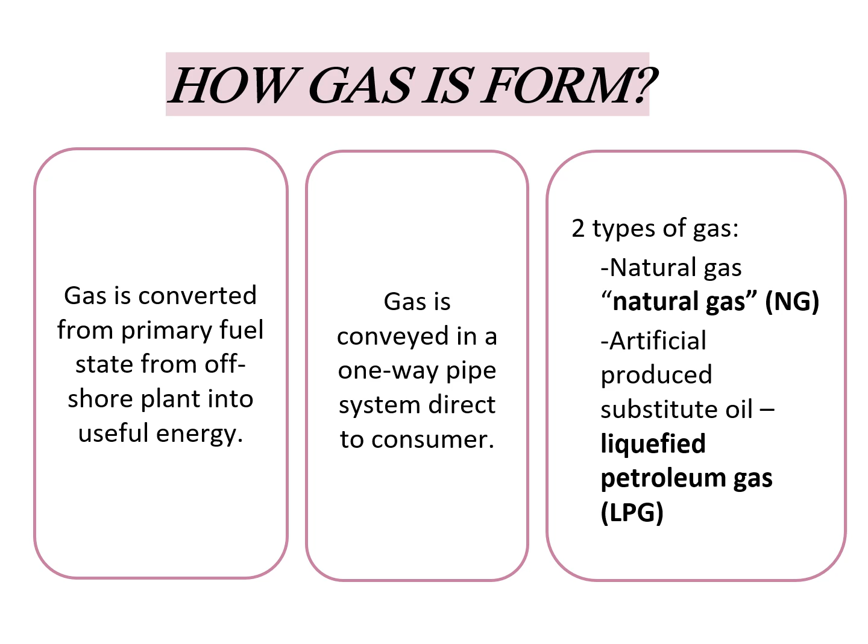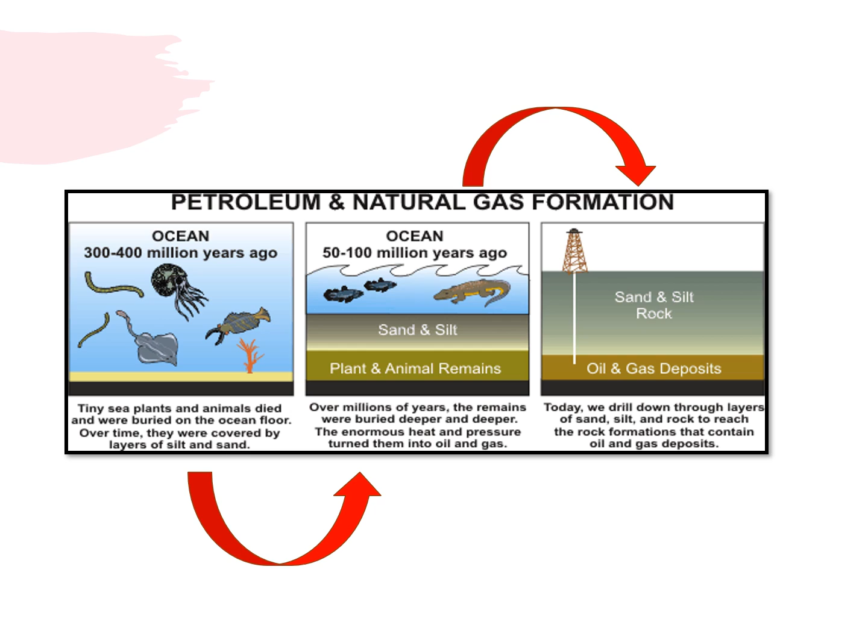Natural gas. What is natural gas? Natural gas is a gaseous fossil fuel consisting primarily of methane, but including significant quantities of ethane, butane, propane, carbon dioxide, nitrogen, helium, and hydrogen sulfide.

Methane consists of 95% propane and 5% butane. It is extracted from crude oil and natural gas. Natural gas is informally referred to as simply gas, especially when compared to other energy sources such as electricity.

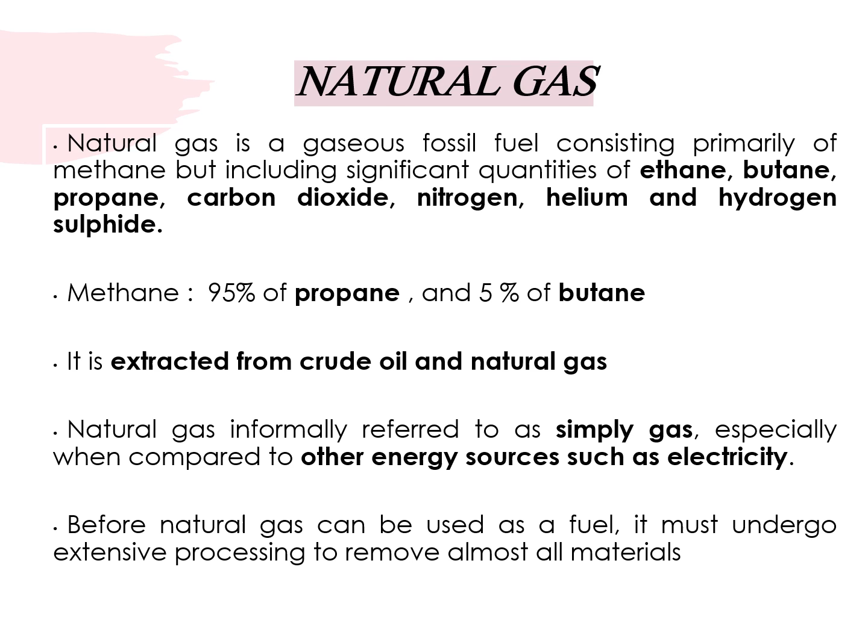Before natural gas can be used as a fuel, it must undergo extensive processing to remove almost all materials that can act as a clean alternative, while it will produce relatively few pollutants, fewer emissions than coal or oil, and has virtually no ash particles left after combustion.

In Malaysia, natural gas is used for residential and industrial activities such as the production of steel, glass, and ceramics. These days, even electricity generation and transportation have started to reap the benefits of using natural gas.

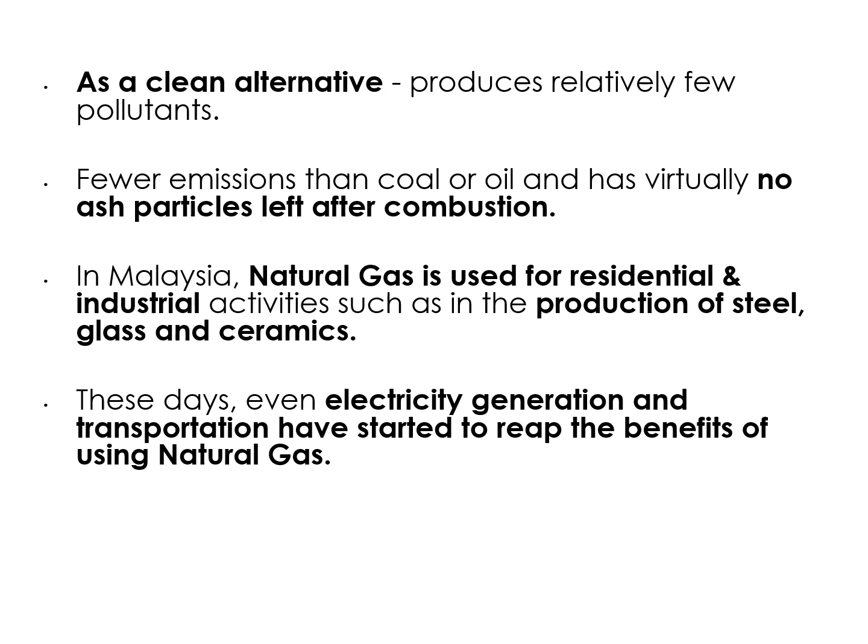Gas Supply Act 1993. The Gas Supply Act 1993 provides for the appointment and functions of a Commission of Gas Supply, the licensing of the supply of gas to consumers through pipelines. Other related matters include the supply of gas at reasonable prices, the control of gas supply pipelines, installations and appliances with respect to matters relating to safety of individuals and for purposes connected therewith.

Section 30, Number 8. No person shall, without the lawful authority of the licensee, undertake any work or engage in any activity in the vicinity of any gas pipeline or installation or part thereof in a manner likely to interfere with such pipeline or installation or part thereof, or to cause danger to any person or property, unless the licensee has taken all reasonable steps to give proper notice on the existence of any pipeline or installation or part thereof and measures as prescribed by the Commission for the protection of such pipeline or installation or part thereof.

Section 30, Number 9. Any person who contravenes subsection 8 shall be guilty of an offence and shall, on conviction, be liable to a fine not exceeding 5,000 ringgit or to imprisonment for a term not exceeding 2 years, or to both.

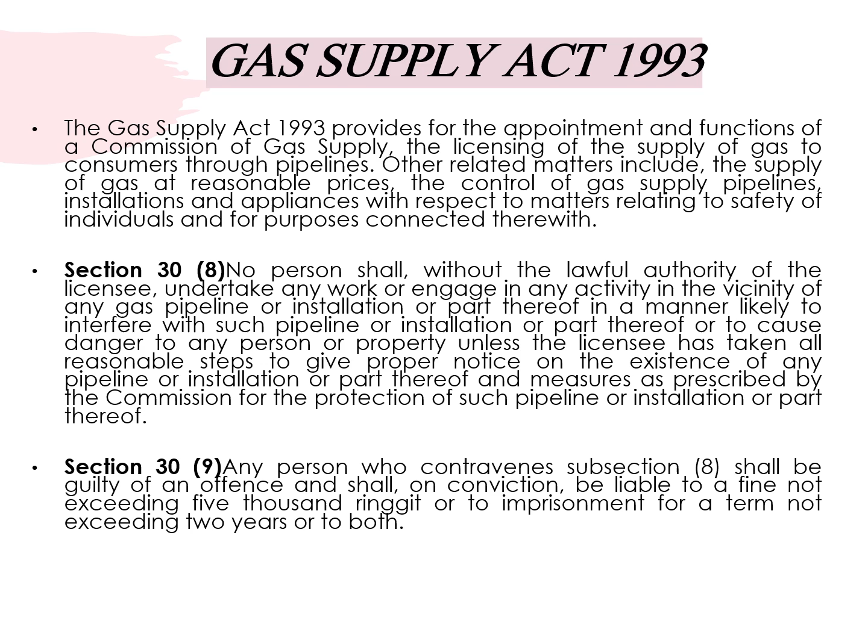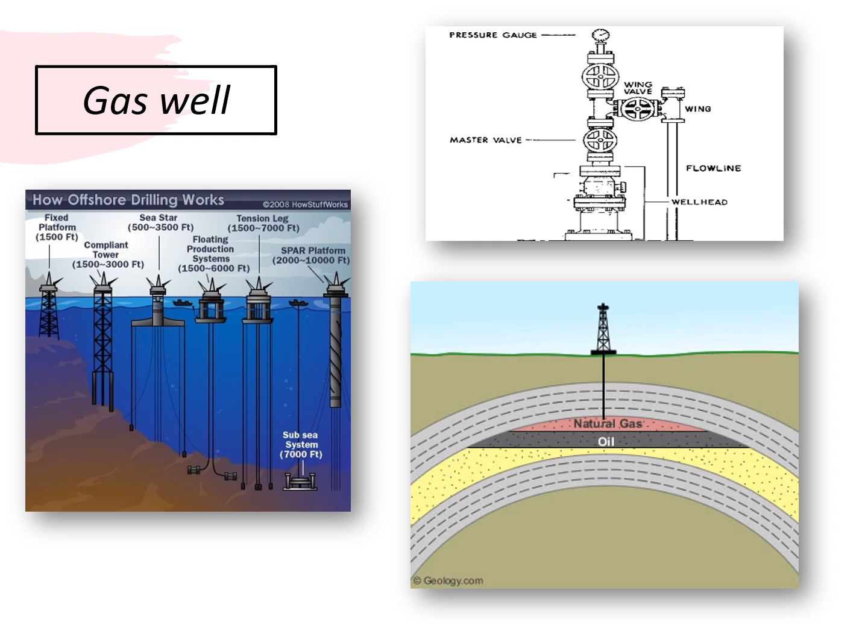Gas well. What is a gas well? A gas well is a boring in the earth that is designed to bring natural gas to the surface. As you can see in the picture, this shows how offshore drilling works. Natural gas specific wells are wells drilled exclusively for natural gas and contain little or no oil.

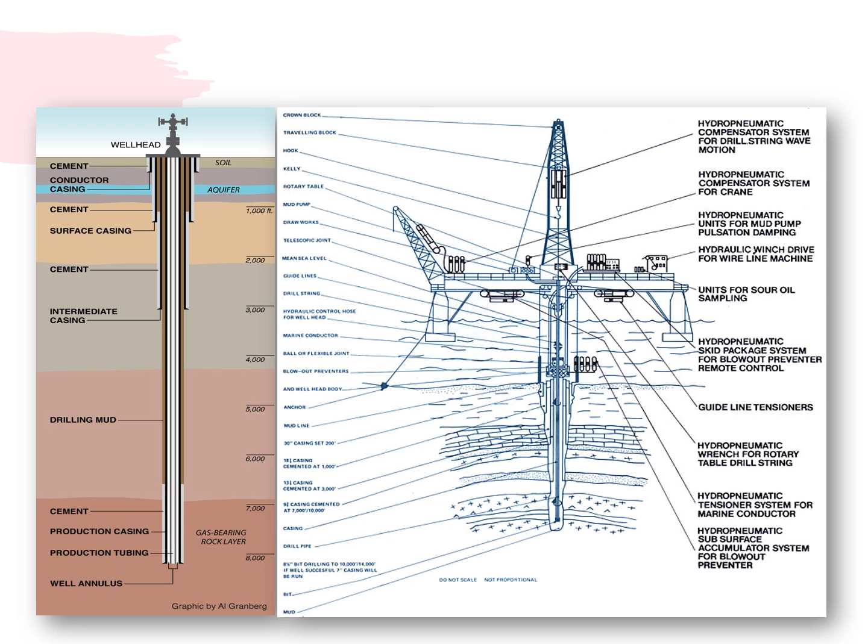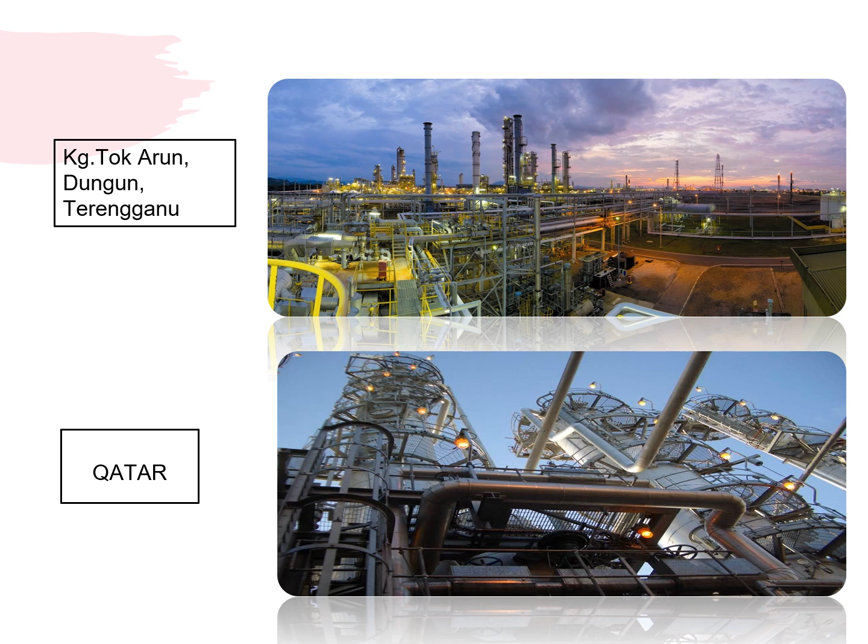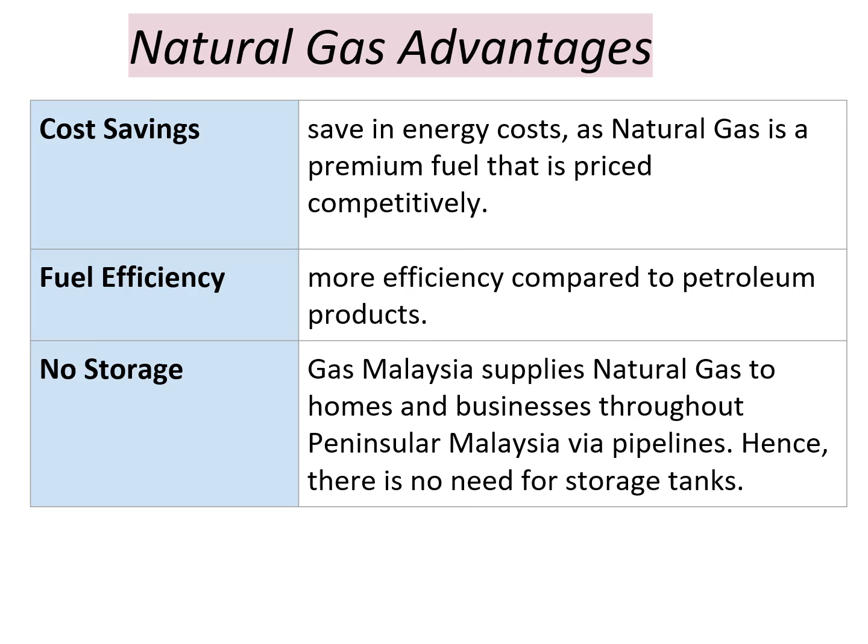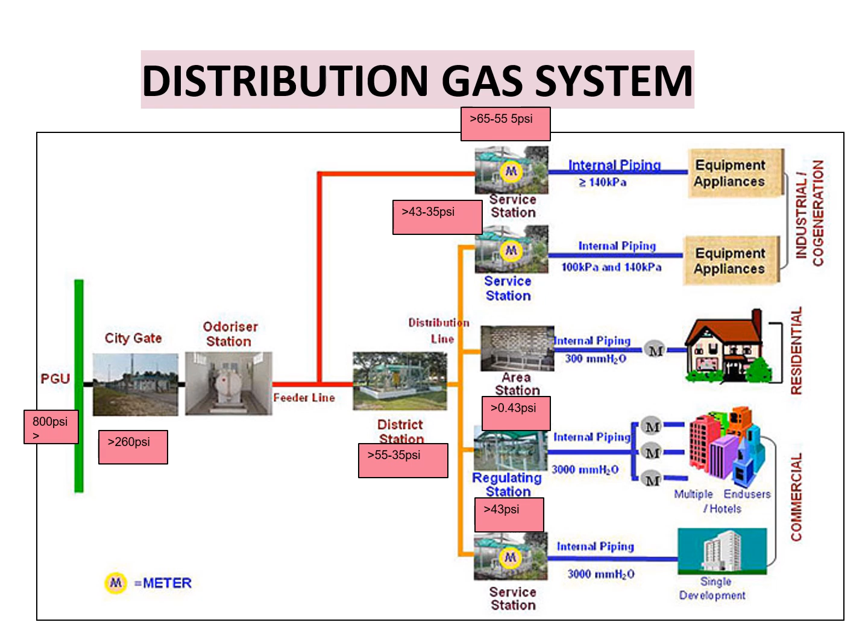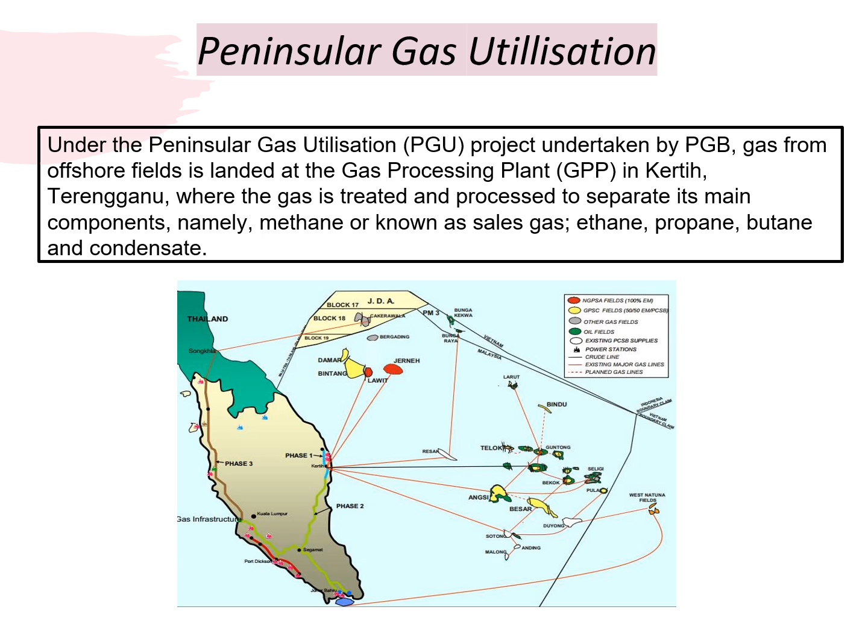As you can see, these are the line pipes of Peninsular Gas Utilization. There are three phases of the PGU pipes, and also two loops of Peninsular Gas Utilization. From Port Dickson to Sepang, there is a multi-product pipeline used for PGU.

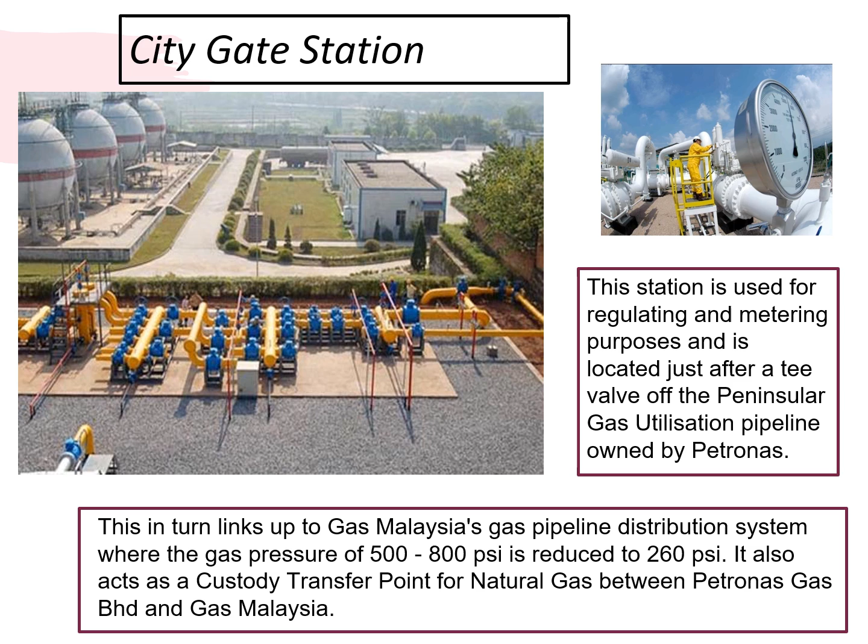City Gate Station. The City Gate Station is used for regulating and metering purposes, and it is located just after a tee valve off the Peninsular Gas Utilization pipeline owned by Petronas. This in turn links up to the Gas Malaysia gas pipeline distribution system, where the gas pressure of 500 to 800 psi is reduced to 260 psi. It also acts as a custody transfer point for natural gas between Petronas Gas Berhad and Gas Malaysia. As you can see in the picture, this is the City Gate Station.

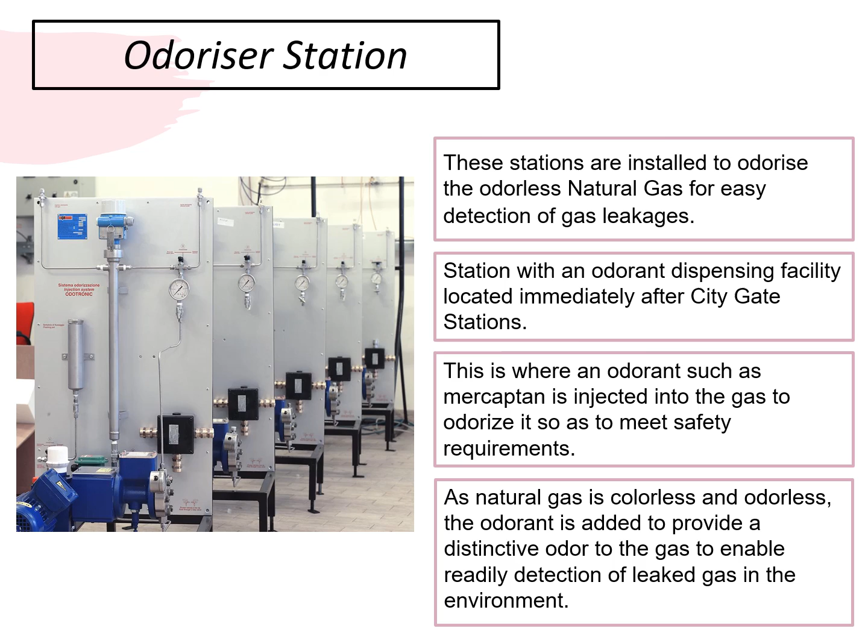Feeder line is steel pipelines. These steel pipelines, measuring between 4 inches to 16 inches in diameter, are designed to carry a maximum pressure of 360 pounds per square inch (psi). These pipelines transport large volumes of gas from the Peninsular Gas Utilization pipeline to the district station.

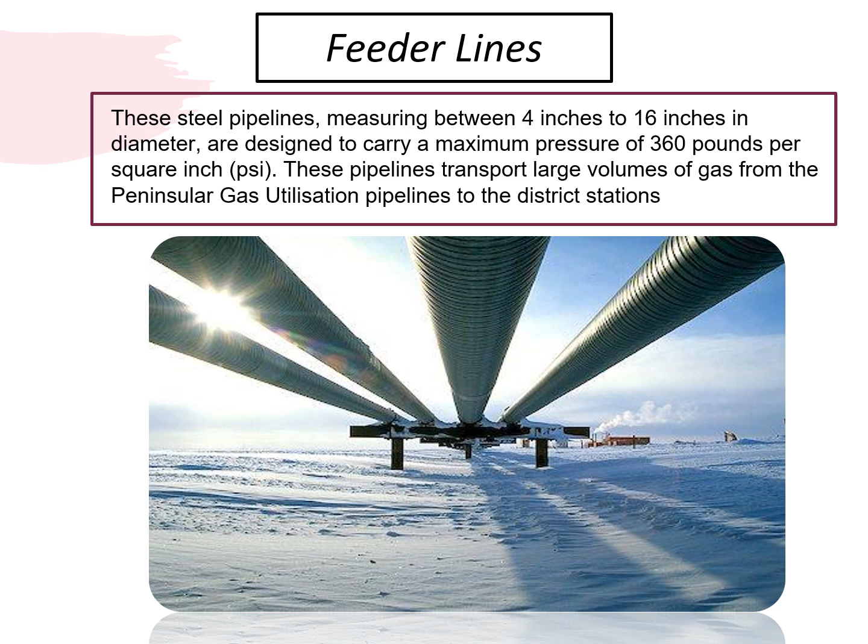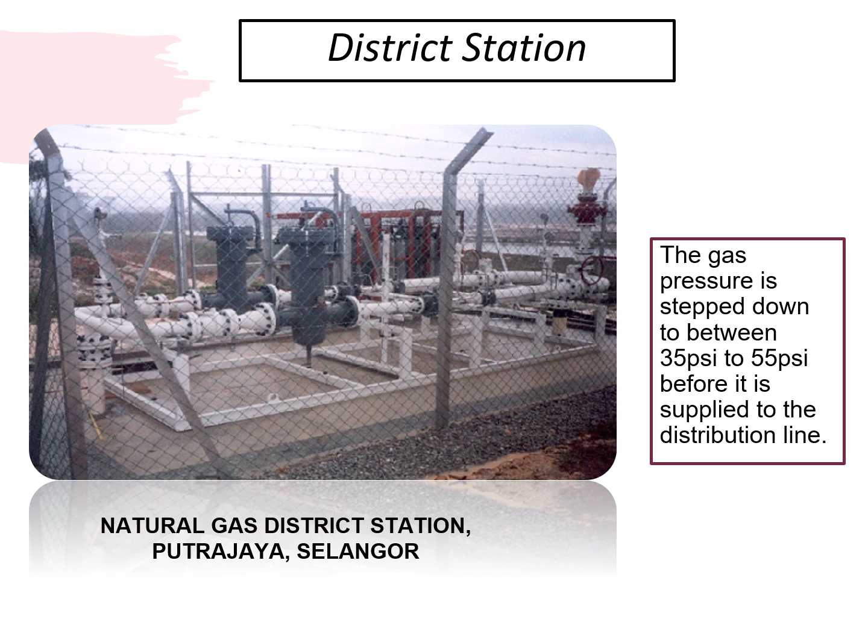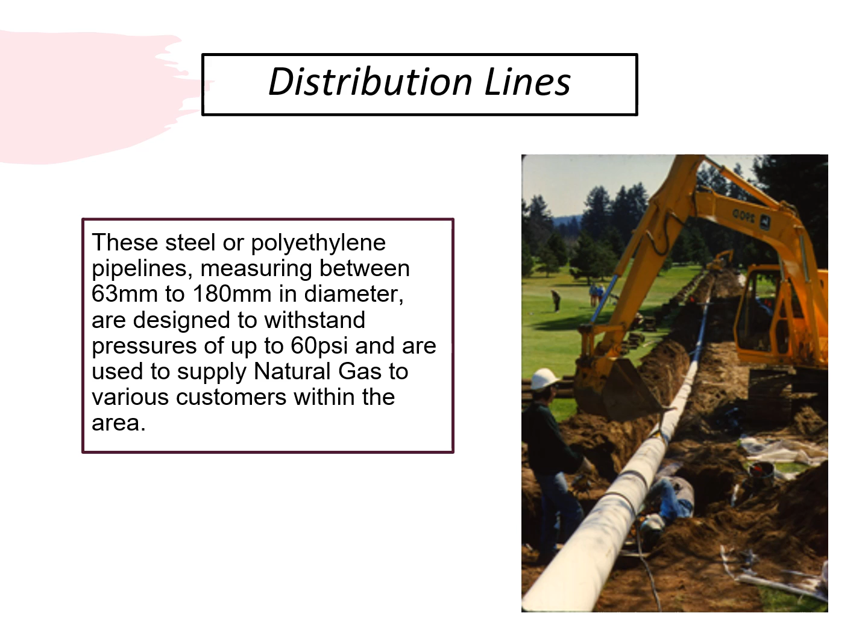Distribution lines are steel or polyethylene pipelines. These pipelines, measuring between 63 mm to 180 mm in diameter, are designed to withstand pressures of up to 60 psi and are used to supply natural gas to various customers within the area.

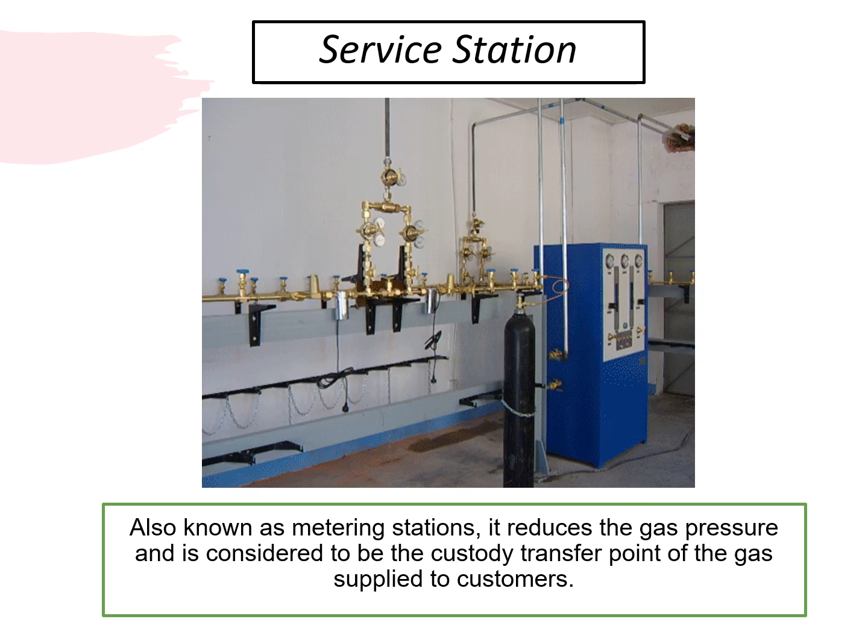Service station. Service stations, also known as metering stations, reduce the gas pressure and are considered the custody transfer point of the gas supplied to customers, usually for industrial and commercial buildings.

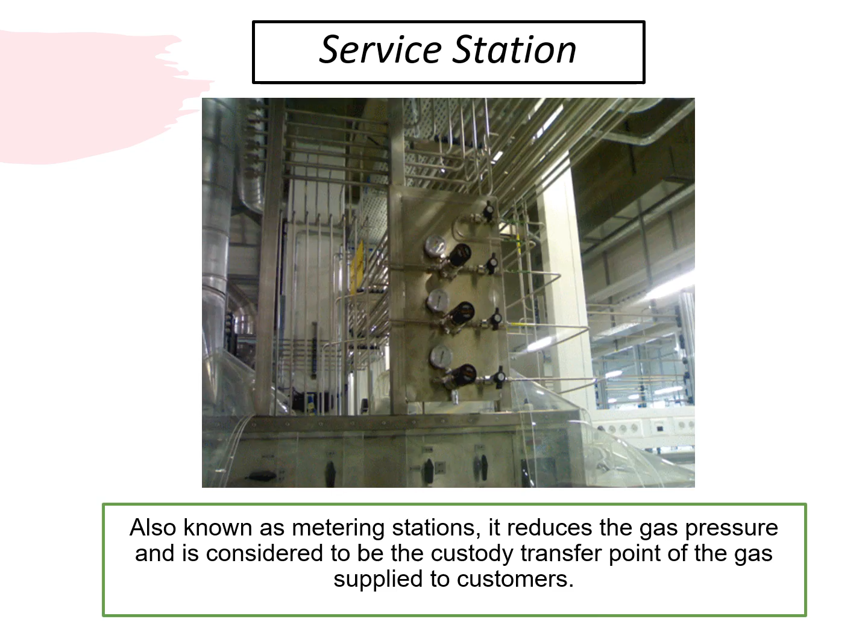Regulating system. This regulating system is usually a delivery point where the Gas Malaysia distribution pipeline gas pressure is reduced to 4.3 psi before being supplied to commercial customers.

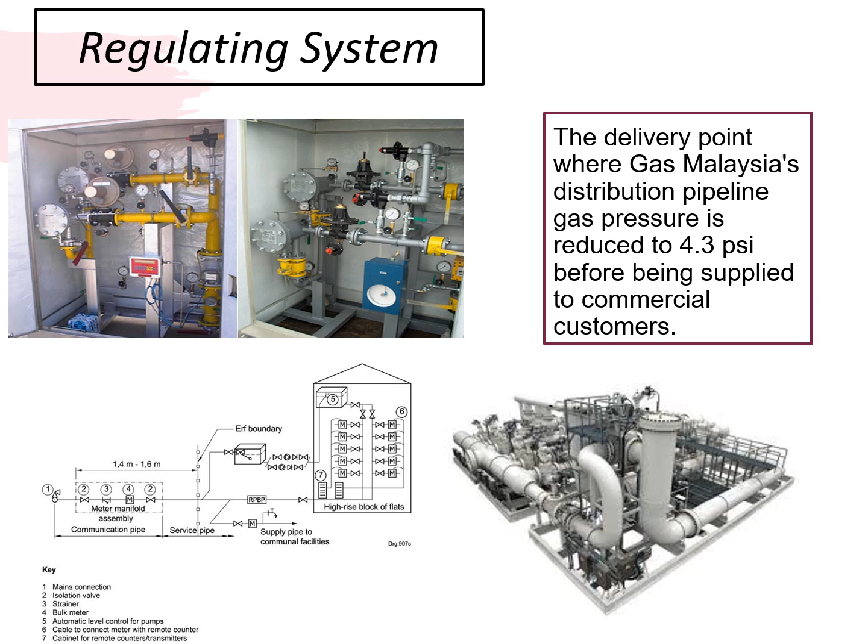Last one is the gas area station. The gas area station is the delivery point where Gas Malaysia's distribution pipeline gas pressure is reduced to 0.43 psi before being supplied to residential customers.

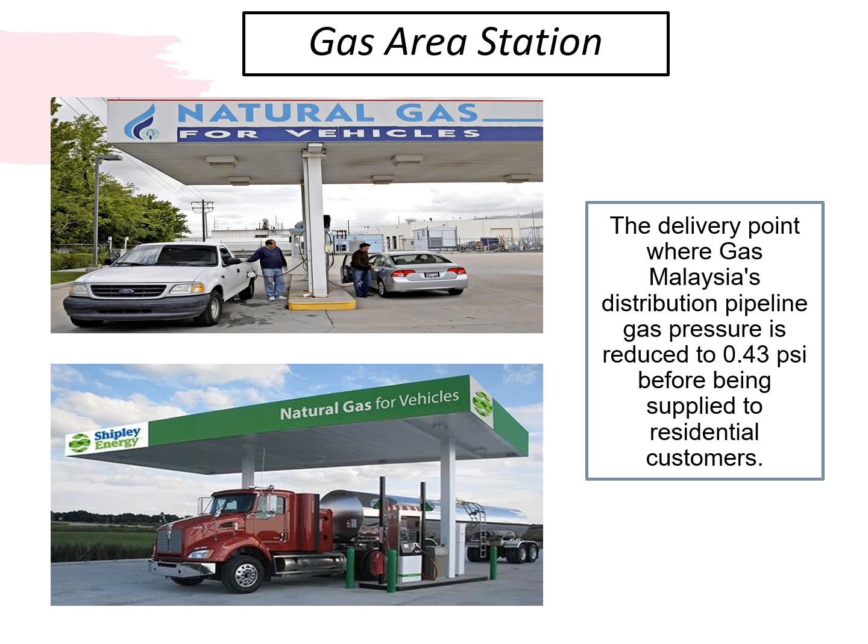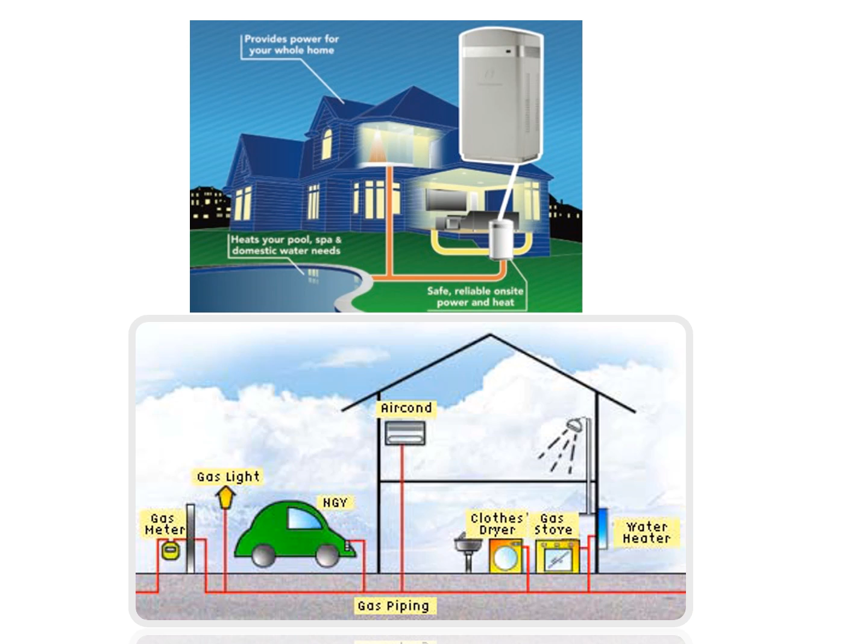There is also a gas meter outside the house. From the gas meter, there is gas piping that will deliver the natural gas for gas light, aircon, clothes dryer, gas stove and also the water heater.

Liquefied petroleum gas (LPG). LPG is produced through the petroleum filtration process. LPG consists of 70% propane and 30% butane. It functions for heating, developed for residential or domestic use such as cooking and heating. It can also be used in the refrigeration cycle, commonly found in refrigeration systems. Liquefied petroleum gas is an important source of energy for many homes and businesses in Malaysia.

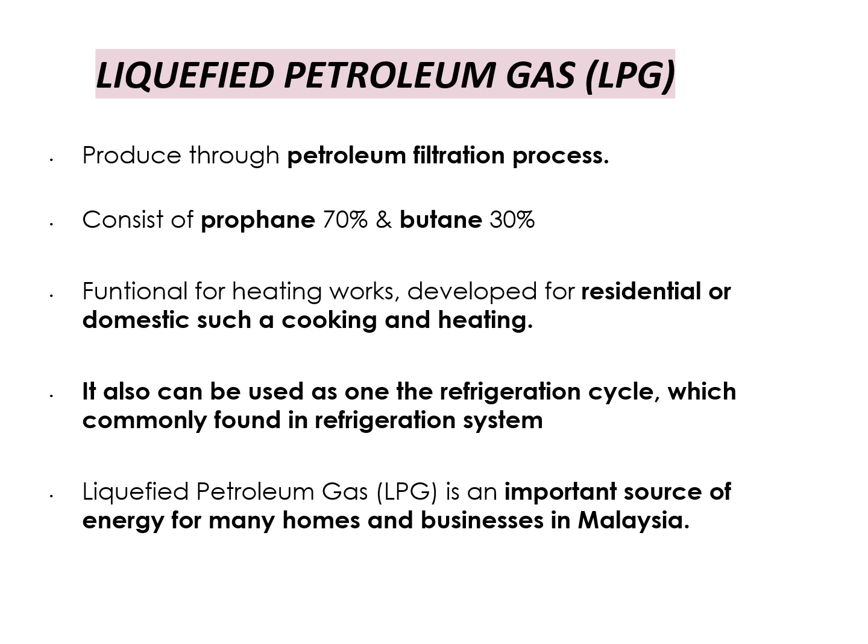Liquefied petroleum gas supply concept. Gas Malaysia supplies LPG to homes and businesses using a pipe gas system. Hence, there is no need for actual storage of gas cylinders within your kitchen or business premises. LPG is stored using one of two methods, namely the bulk tank system and the manifold system. These systems are connected to your home and appliances via secure and isolated underground distribution pipes.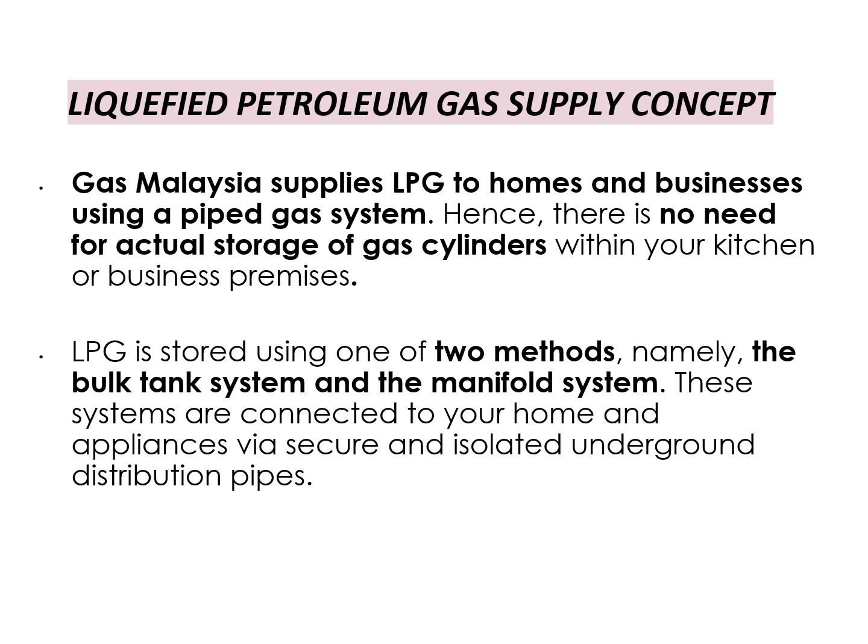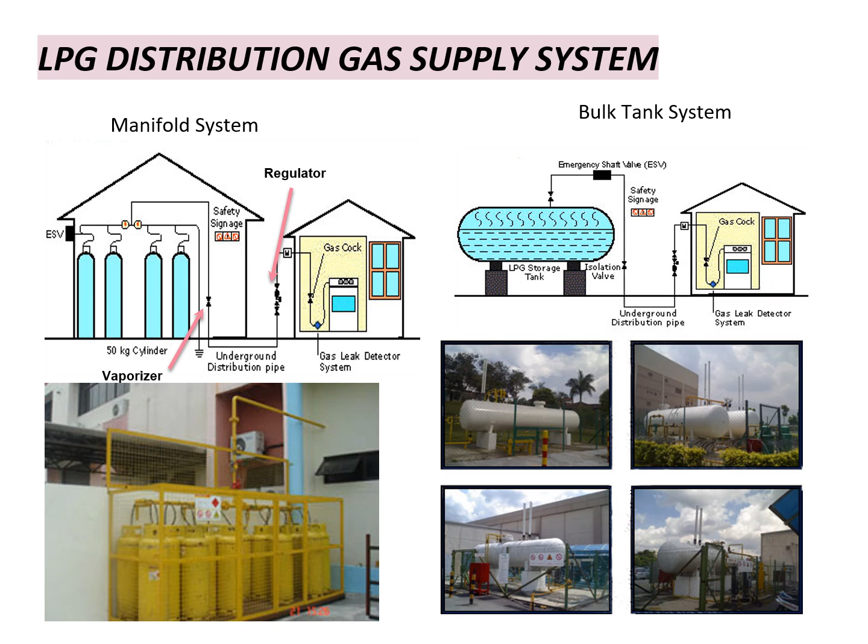LPG distribution gas supply system. There are two types of LPG supply systems: the manifold system and the bulk tank system. The type of system used depends on the type of building. Both systems use underground distribution pipes to deliver the gas either to the manifold or the bulk tank. This is the underground distribution pipe that will distribute the gas to the manifold system and also the bulk tank system.

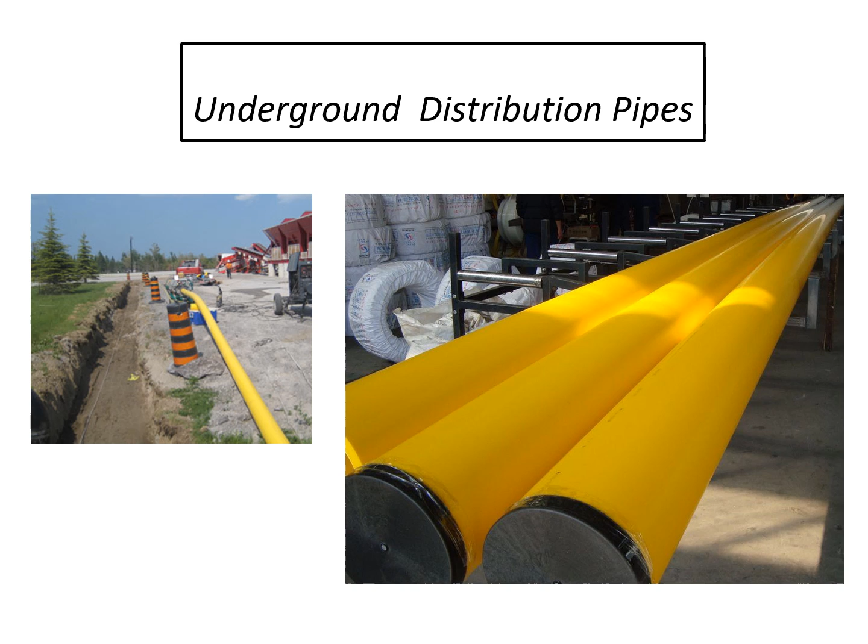Advantages of LPG. There are two advantages. First is safety: LPG not only saves space in your kitchen, which would otherwise be used to house a gas cylinder. Second is continuous, uninterrupted supply: you not only enjoy a continuous supply of gas, but also no longer have to change gas cylinders or worry about stocking up cylinders.

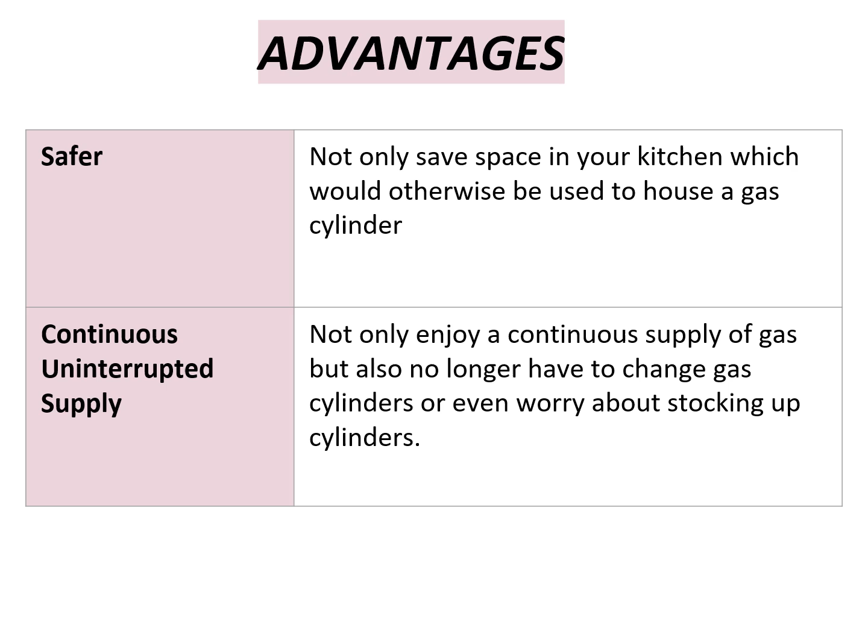The comparison between natural gas and LPG. The type of building for natural gas is mostly used for factory and residential only, while LPG is used for industrialized, commercial, and also residential buildings.

The type of gas for natural gas is methane, which consists of 95% methane and 5% propane and butane. For LPG, it's 70% propane and 30% butane.

The pressure for natural gas is low pressure, 60 psi, reduced until 0.43 psi. For LPG, higher pressure is needed, 60 psi reduced to 3 to 4 psi. The supply pipe for natural gas is buried below ground level, while for LPG a portable tank is used.

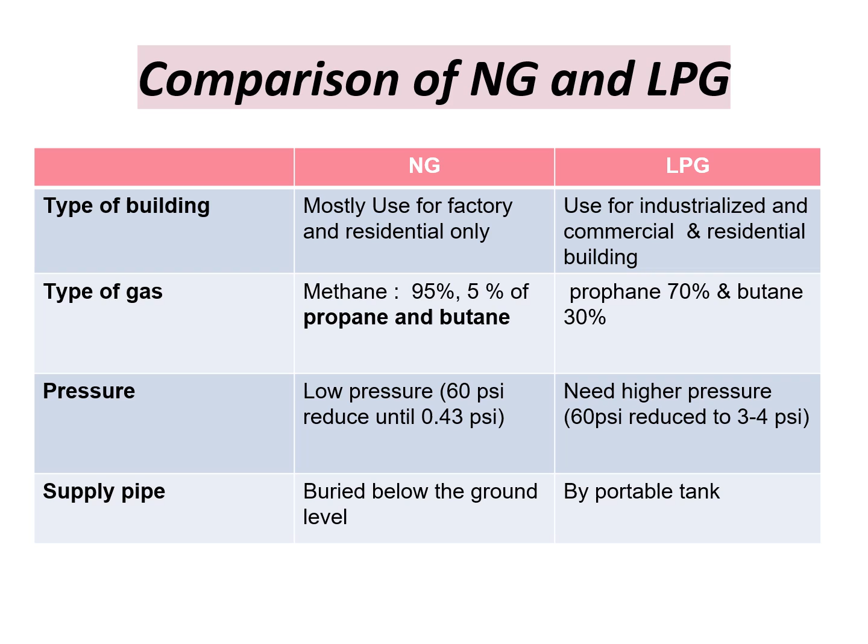Next is the components of the gas supply system. There are 8 components: LPG tank, gas leak detector, vaporizer, regulator, meter, valve, thermostat, and piping system.

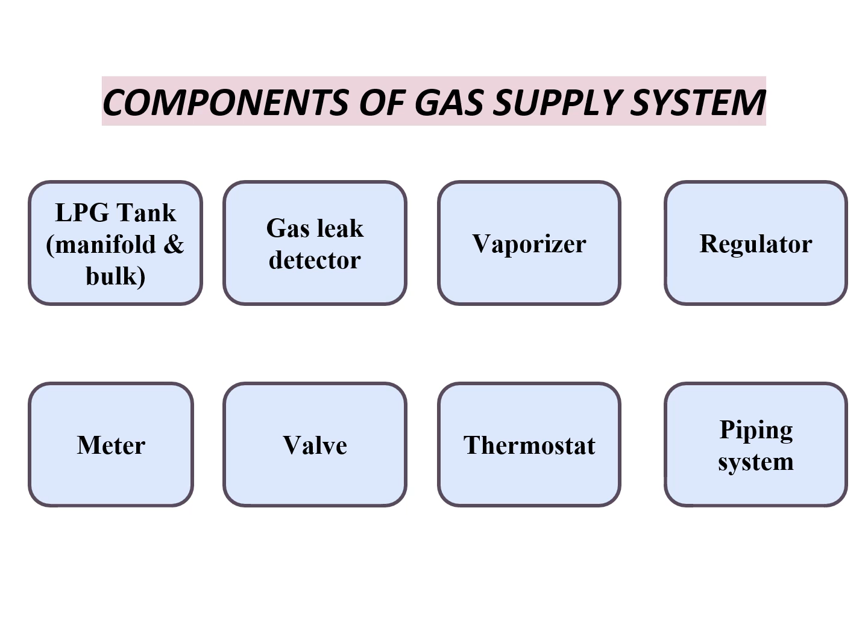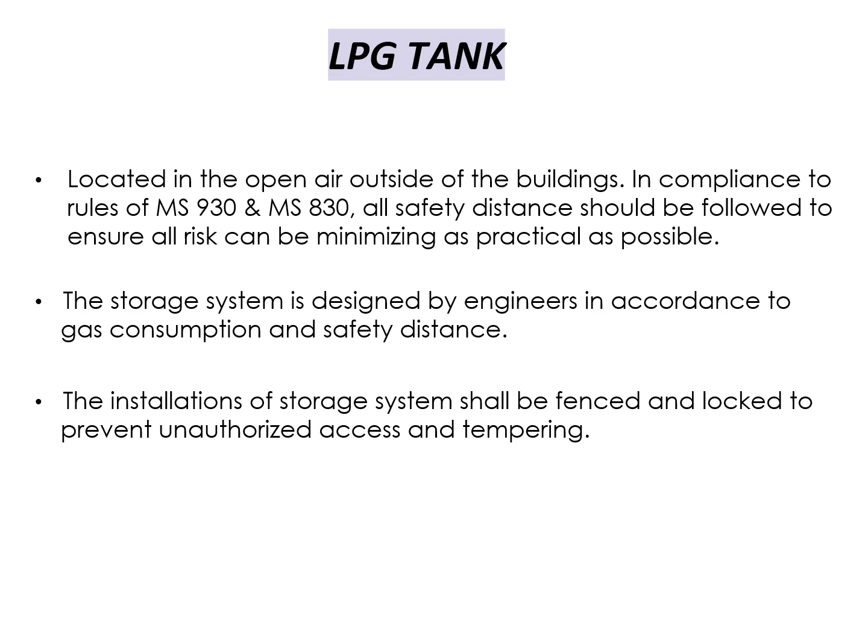LPG tank. The LPG tank is located in open air outside of buildings. In compliance with MS 930 and MS 830, all safety distances should be followed to ensure risks can be minimized as practical as possible. The storage system is designed by engineers according to gas consumption and safety distance. Installations of the storage system should be fenced and locked to prevent unauthorized access and tampering.

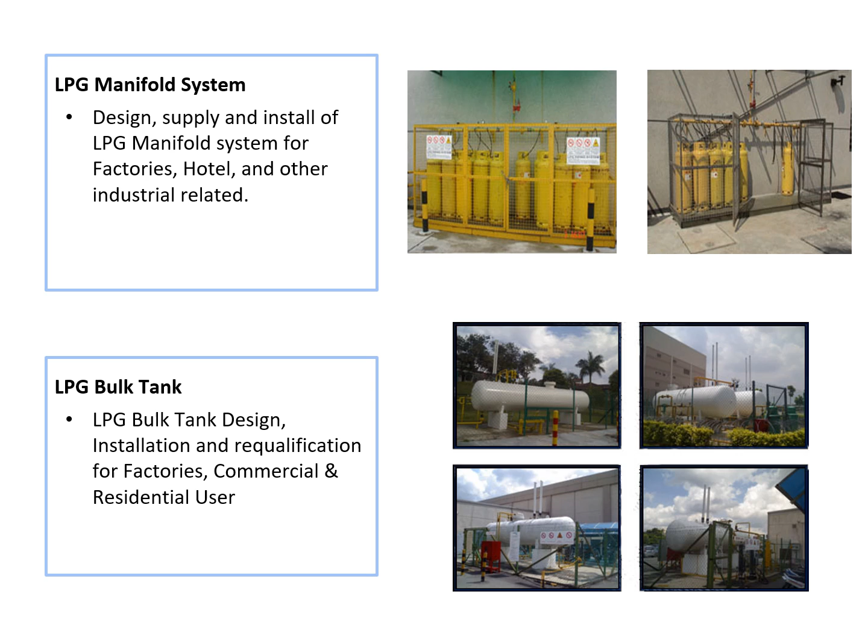Two types of LPG gas supply systems are the LPG manifold system and the LPG bulk tank. The LPG manifold system is designed, supplied, and installed for factories, hotels, and other industrial related buildings. The LPG bulk tank involves design, installation, and requalification for factories, commercial, and also residential users. The picture shows the bulk tank and also the bulk piping system.

Vaporizer. A vaporizer is a device for converting liquid LPG to vapor. This vaporizer is used for liquid outlet LPG cylinders to supply gases continuously to the appliances. It also ensures sufficient gas has transformed from liquid state to gaseous state to maintain sufficient gas pressure in the pipeline. As you can see in the picture, this is the vaporizer.

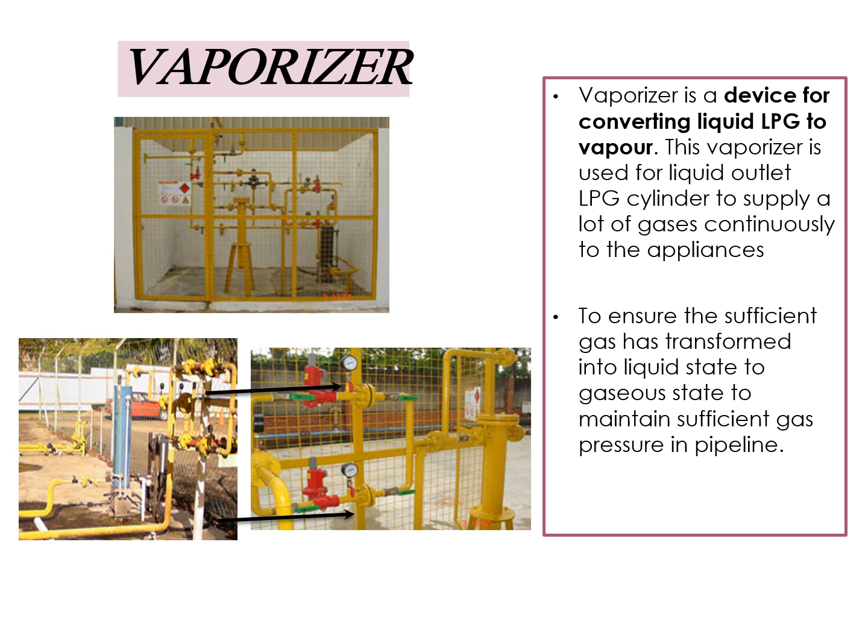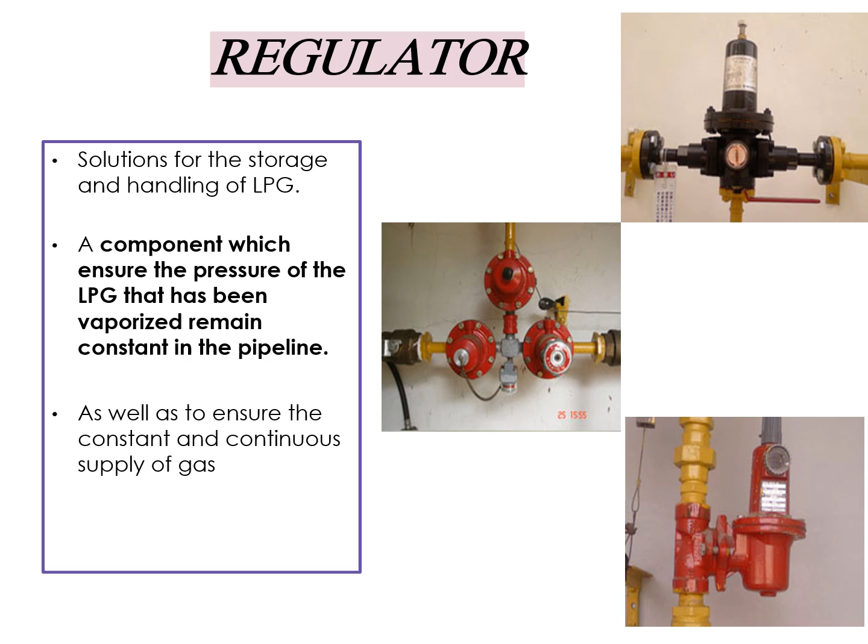Regulator. The regulator is the solution for the storage and handling of LPG. It is a component which ensures the pressure of the LPG that has been vaporized remains constant in the pipeline, as well as ensuring the constant and continuous supply of gas.

Gas leak detector. The gas leak detector acts as a safety precaution for residential and commercial clients. The convenience of either natural gas or LPG alarm detection units means proper action can be taken to prevent unexpected accidents from happening due to gas leakage. The gas leak detector is usually located inside the building.

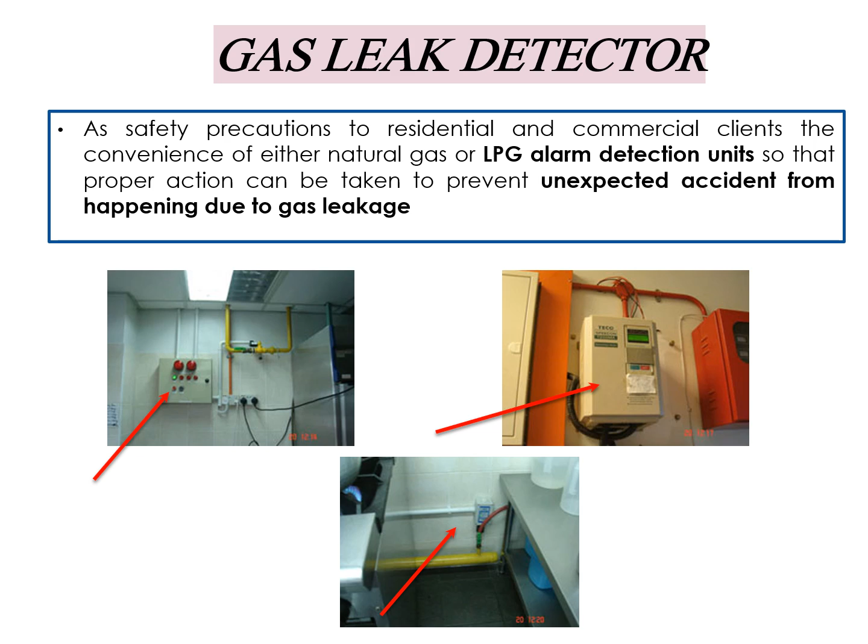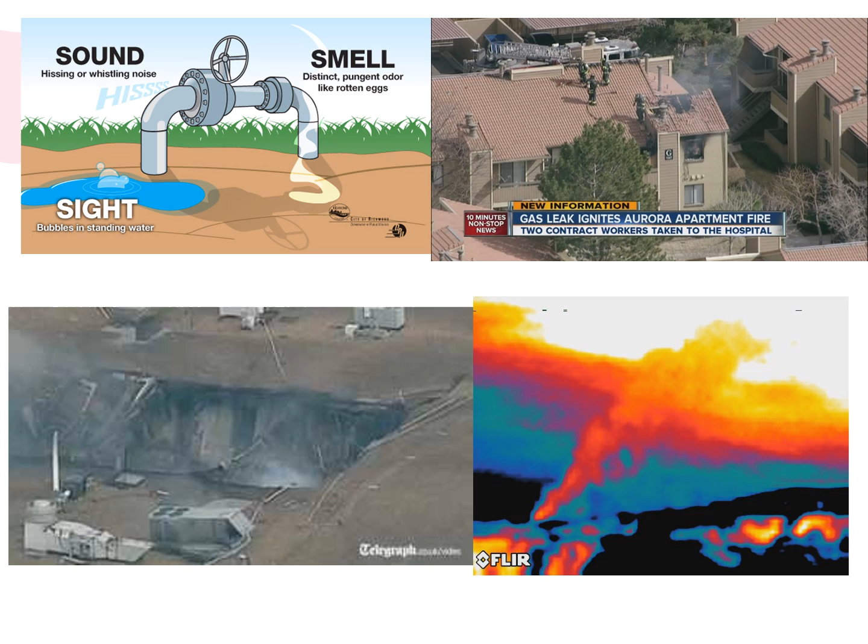Now you can see in the picture the leaking of the distribution lines. Leaking can be detected through sound as well as odor. The sound can be heard as a hissing or whistling noise, while the smell will have a distinct pungent odor like rotten egg.

As you can see in the picture, a gas leak ignites the Aurora apartment fire. This happened in another country; when the leak happens it can cause burning and explosions.

This picture shows the natural gas explosion. The natural gas explosion is usually caused by leaking at the distribution pipe.

Meter. The purpose of the gas meter is to measure the amount of gas used by customers. A gas meter is a specialized flow meter used to measure the volume of fuel gases. Gas meters are used at residential, commercial, and industrial buildings that consume fuel gas supplied by a gas utility. Gas meters measure a defined volume, regardless of the pressurized quantity or quality of the gas flowing through the meter.

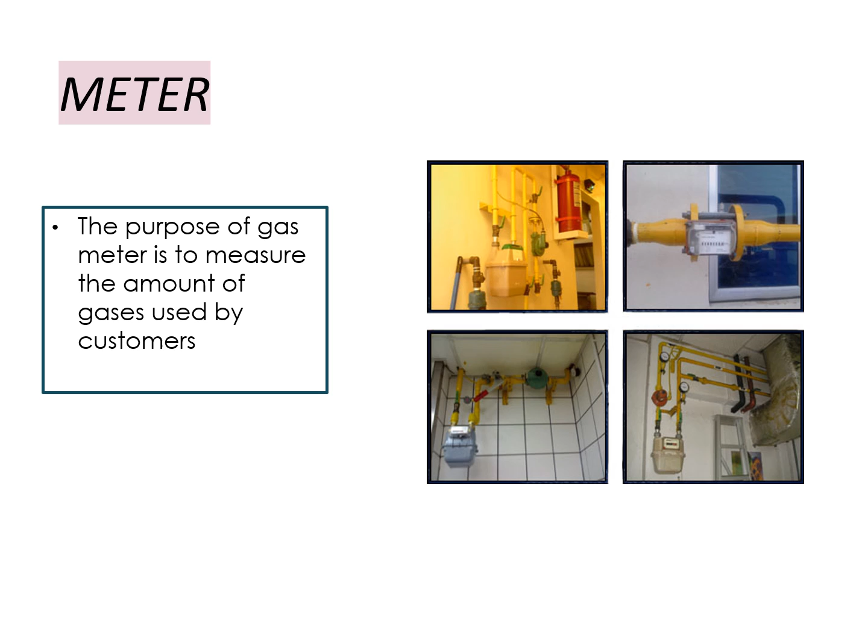Thermostat. Thermostats are used in any device or system that heats or cools to a set point temperature. The purpose of the thermostat is to maintain a certain degree of temperature, turning off the heat source when the temperature rises above a particular level, detecting temperature and signaling when the set temperature has been reached, causing another operation to occur.

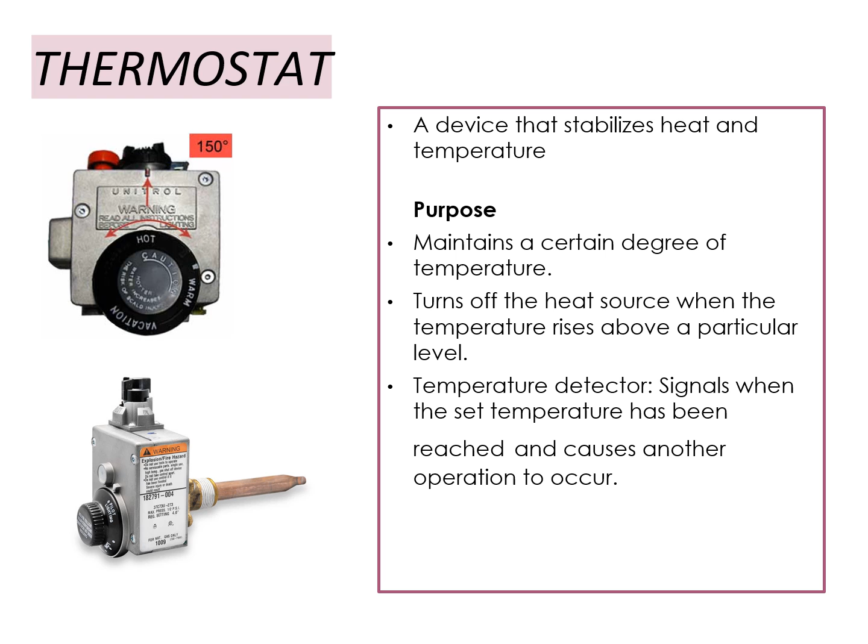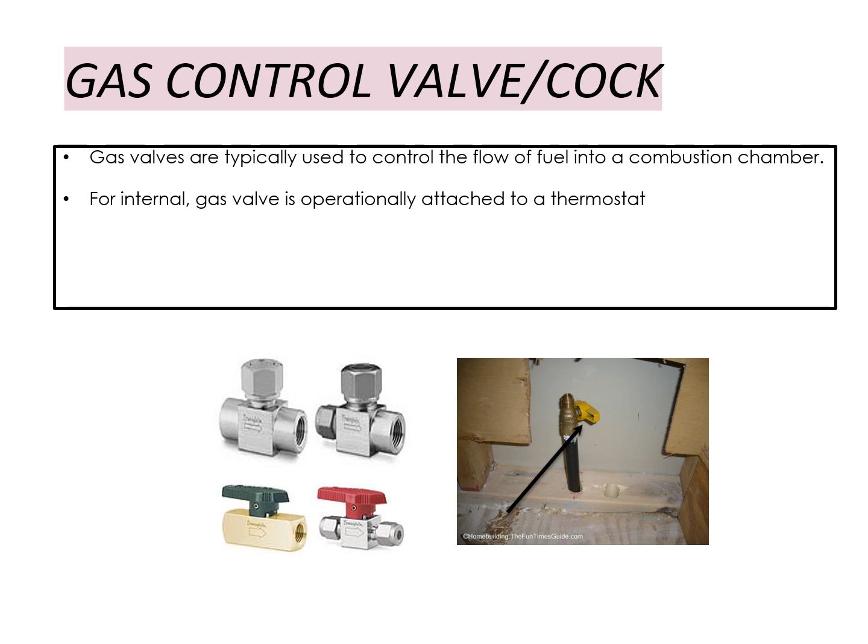Gas control valve or cock. Gas valves are typically used to control the flow of fuel into a combustion chamber. Internally, the gas valve is operationally attached to a thermostat.

The last one is the piping system. This usually uses carbon steel pipe for above-ground piping with pipe fittings welded properly, free from cutting, burst, and defect. Polyethylene pipes are preferred for underground natural gas piping lines. Being lighter, polyethylene pipe can only hold pressures less than 100 pounds per square inch gauge (PSIG). Natural gas internal piping systems run from the natural gas service station to appliances for factories, hotels, and other buildings.

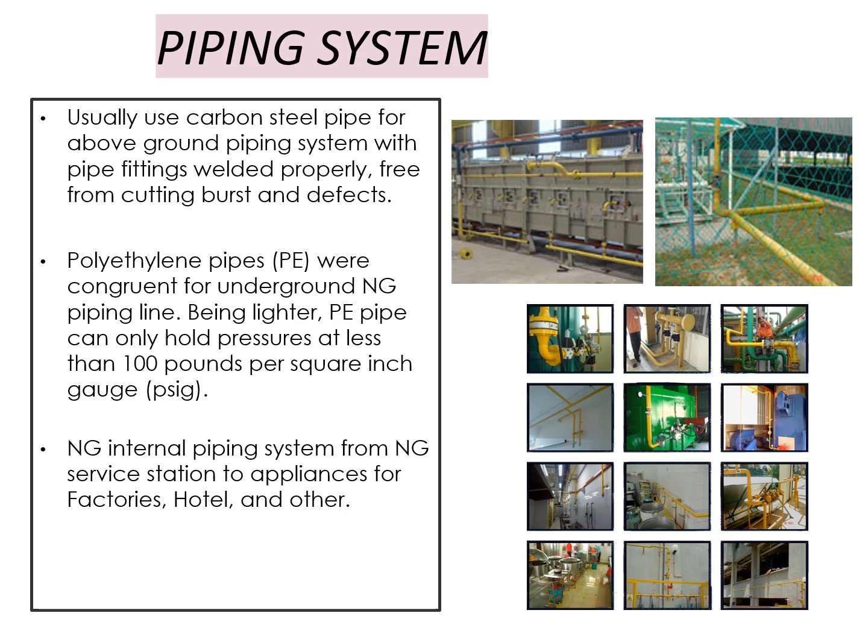That's all for the gas supply system. Thank you.